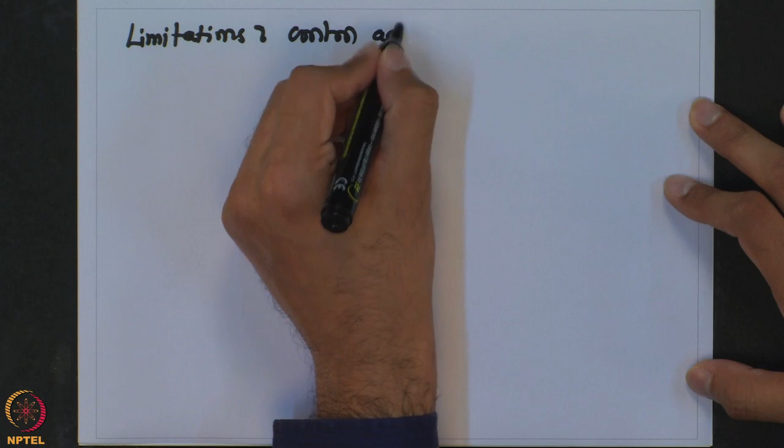When we talk about only the P control, the main limitation is that we do not get offset free response. So always the response will have some offset.

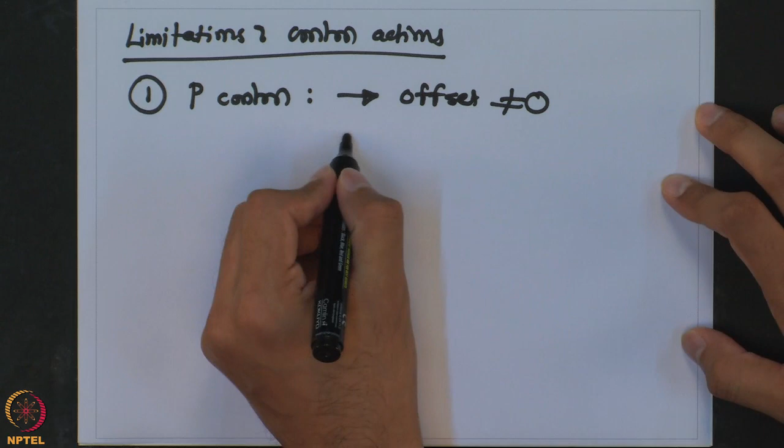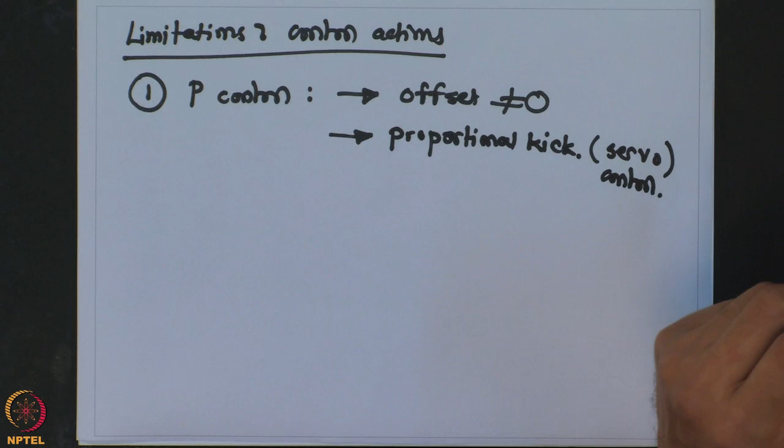And there is one more thing: whenever you have a proportional controller, it results in proportional kick. When we have a servo control, by proportional kick what I mean is whenever you request certain response...

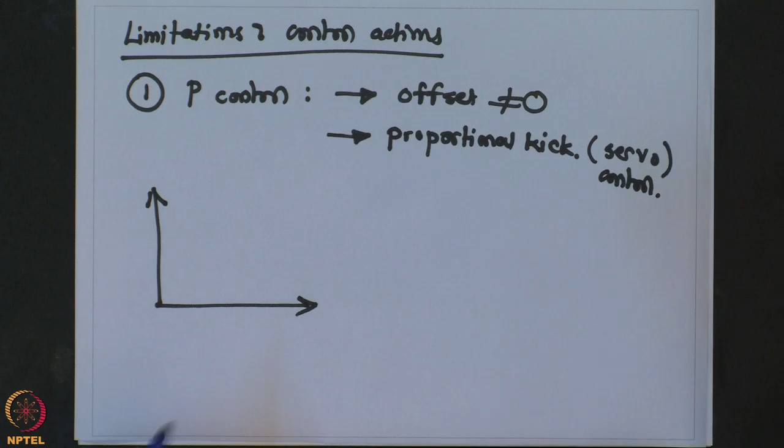Let us say at certain time I requested a set point change. If we try to plot the response of the manipulated variable or the controller output, what you will notice is that the moment this step is applied, the controller will ask a rapid change in the manipulated variable, and then alternate, eventually reaching whatever is the final value.

So this initial jump, the moment the set point change is requested, is known as proportional kick. That means it just kicks the response, it asks the manipulated variable to go to a new value almost instantaneously.

Again, practically this is not possible and it will cause a little delay in terms of reaching the final steady state, but the idea is that it causes this abrupt change in the manipulated variable.

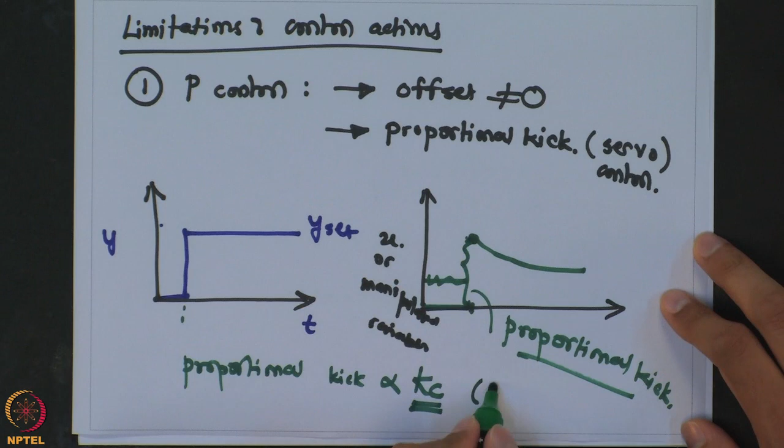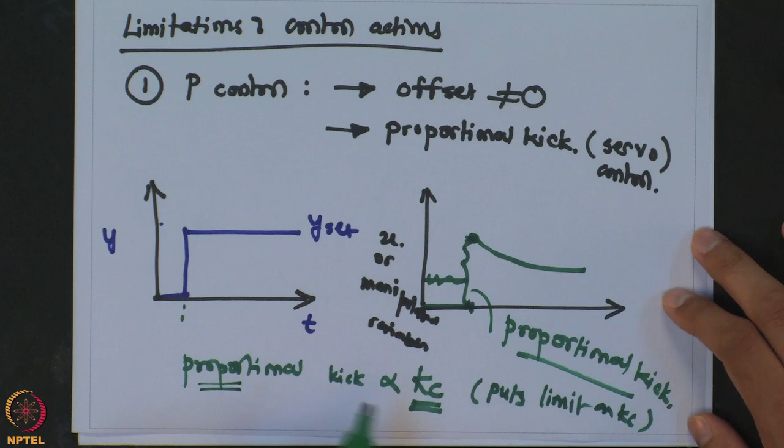So again that puts a limit on the value of Kc I can go with, because we had seen that for a P controller, higher the controller gain, smaller is the offset. So we typically want to go with higher controller gain, but at the same time this proportional kick also increases, which puts a limit on practicability of operation, and limits how much controller gain we can go with. This higher requested value may be more than the maximum value, and in that case it may not be physically realizable.

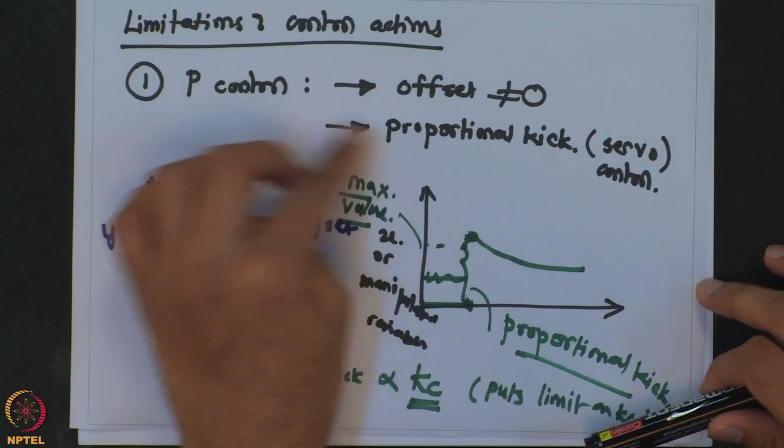So that is the disadvantage or limitation of P control: it will always result in proportional kick when we have a set point change. Now, as this is the limitation of the proportional action, this same kick will be present whenever you have proportional action, a PI controller, or a PID controller as well.

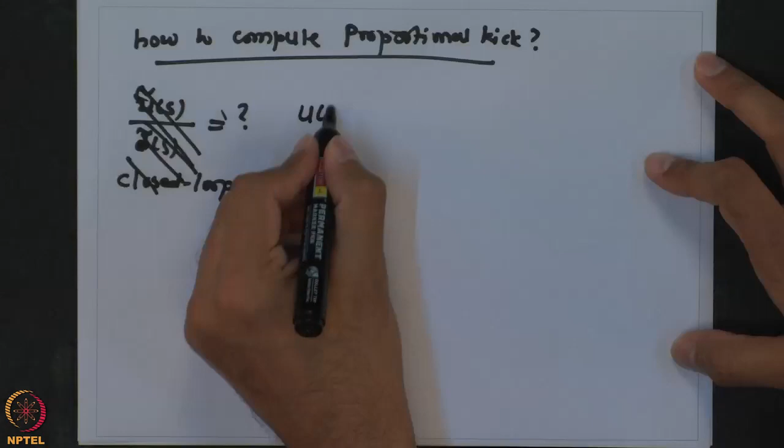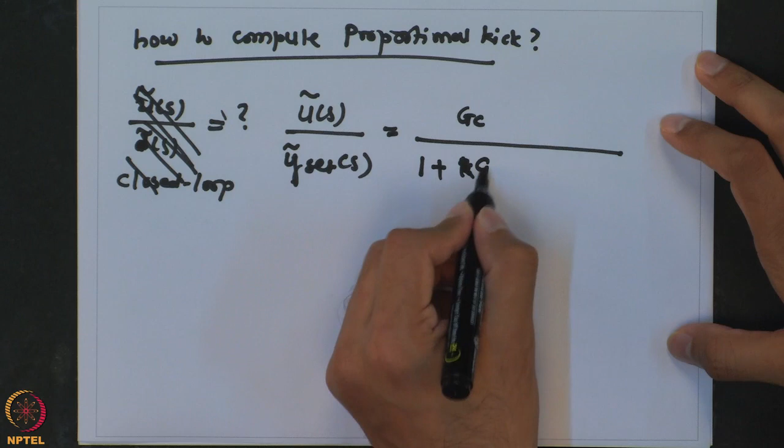Now let us quickly look at how to compute this proportional kick. For that, what we are interested in is finding out u over y set. So when we change the set point, how does the controller output change, and this can be derived as GC over 1 plus GP, GC, GV and GM.

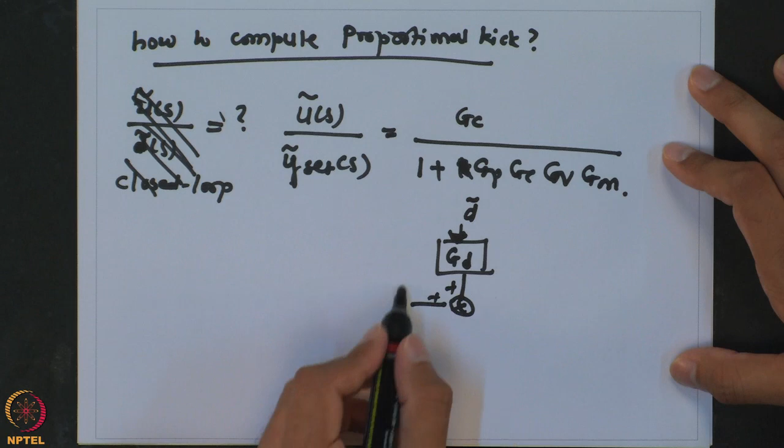So, the easy way to obtain these transfer functions is if we look at the closed loop transfer function block diagram. We may be interested in the transfer function between u and y set, u and d, or how the manipulated variable behaves when we have a set point change or the disturbance occurs.

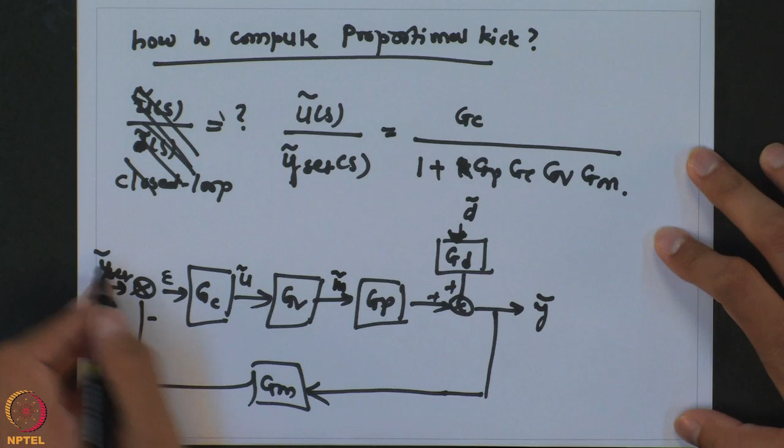So in all these cases you do not need to go through the entire derivation every time. The easiest way to find out these transfer functions is to trace the path from the input to the output. So if we are interested in finding this particular transfer function between y set and u, you just find out what is the direct path between y set and u.

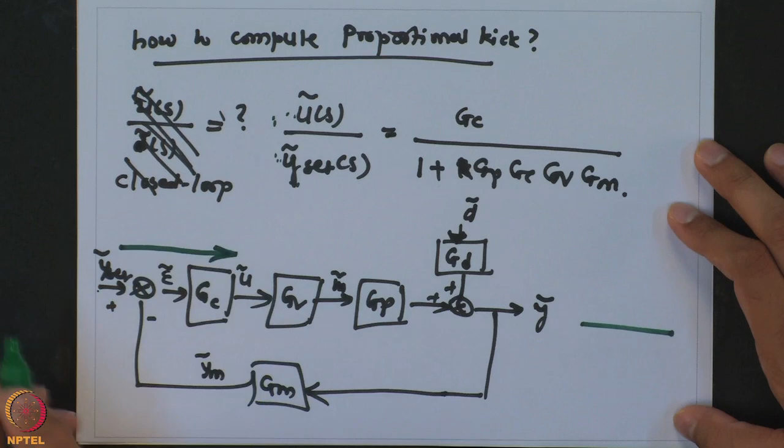So when we are going from y set to u, what we are seeing is there is only one transfer function in between. So we put that here, and then the denominator depends on the denominator, which is always 1 plus all the transfer functions in the closed loop. So the transfer functions in the closed loop are GP, GC, GV and GM. So it will be GP, GC, GV and GM.

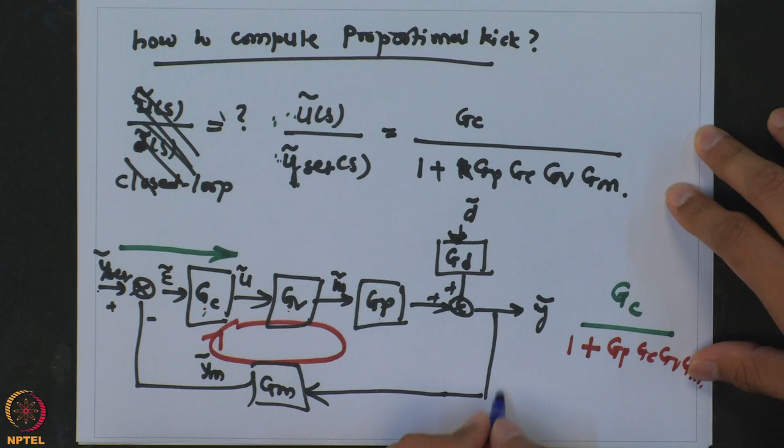Using the same logic, if we were interested in finding the transfer function between, let us say, US over DS, then the denominator remains the same because the closed loop is not changing.

But for the numerator, now we have to go from D to U. So the path it is going to take is this. Let us go through all the transfer functions. So you have GD, then GM, and then we have a negative sign because the effect gets inverted. So you also have to carry that negative sign here, and then GC. That way you can always find the transfer function between any two variables within this closed loop system.

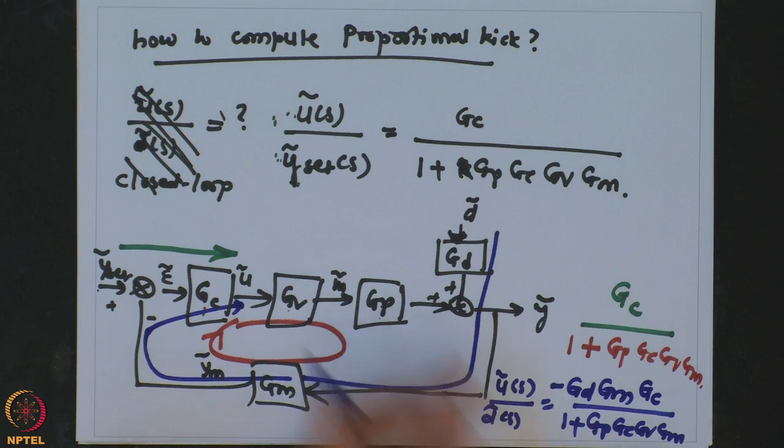Then when you try to find out whenever there is a step change in terms of y set, you will see that the response between u and y set is a first order lead-lag type of system, and that is what causes the initial value to abruptly change to a new value, and that difference gives you the proportional kick.

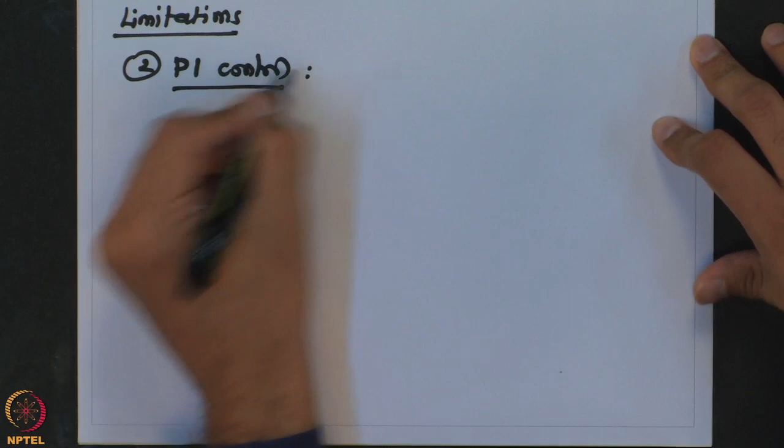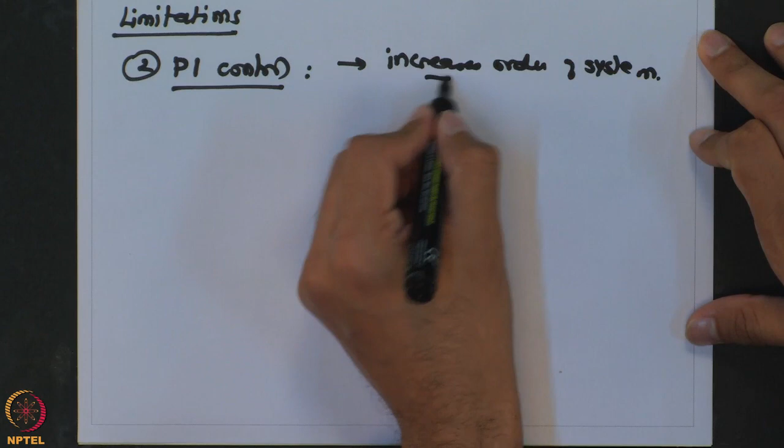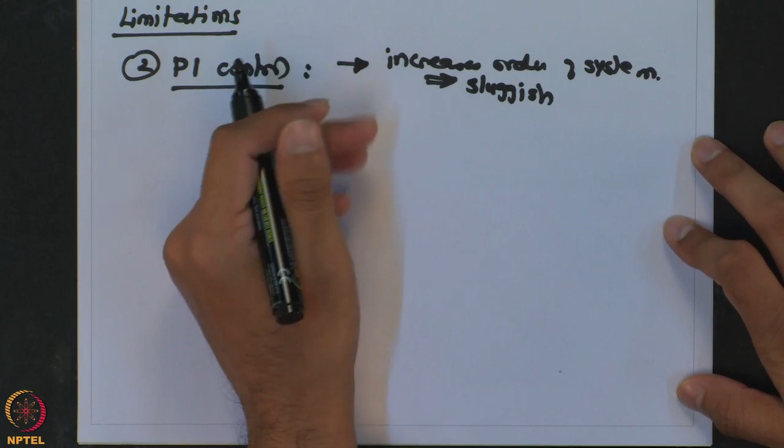Let us now look at the limitations of PI control. One limitation is that it increases the order of the system, so it makes the system sluggish. Though this is not a very big disadvantage, it is partly covered because we have also added some numerator dynamics, so effectively the system response can still be sped up.

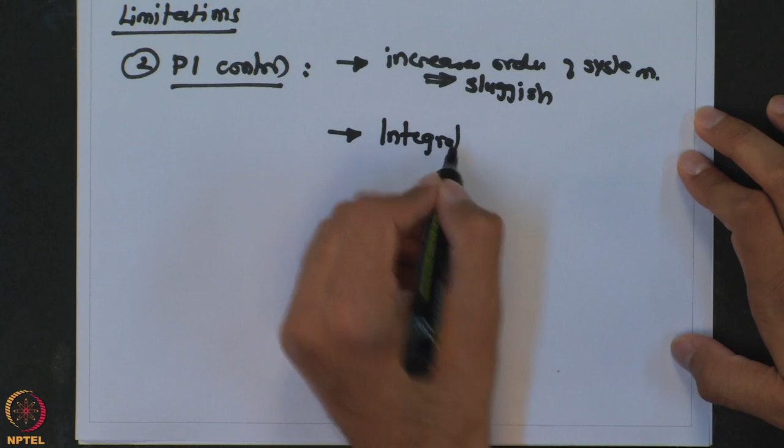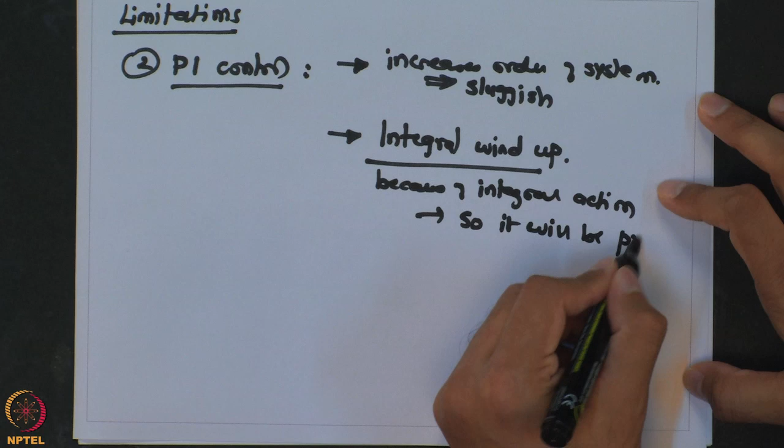The major limitation of PI control is what is known as integral wind up, and this is present because of the integral action. So it will be present in PID also, because it is the product of having an integral action into the system. As integral action is present in PID control as well, this integral wind up may also occur during PID control. Let us look at what integral wind up is.

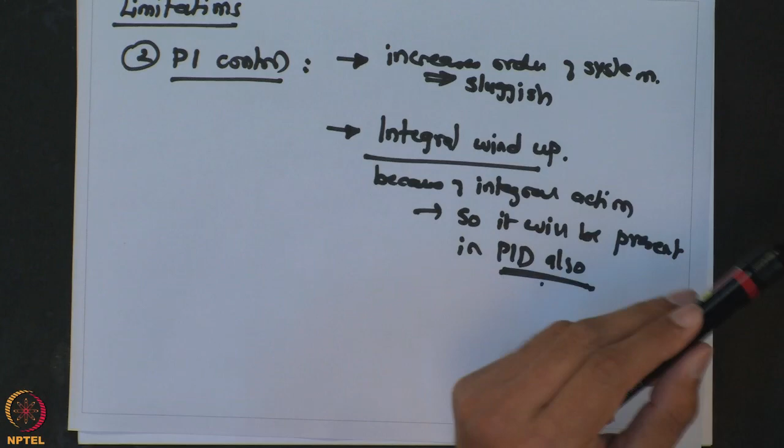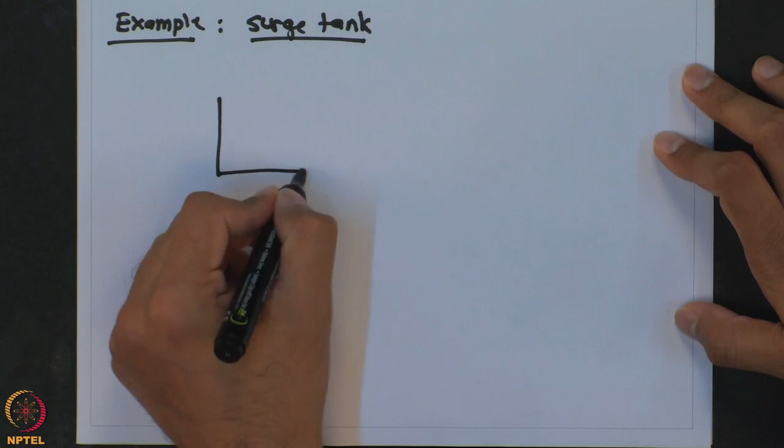For that, let me consider a simple example of a surge tank. Let us consider a surge tank where the inlet is coming at a flow rate of 0.1 meter cube per second, for example. The area is 1 meter square and the level is currently 0.5 meter.

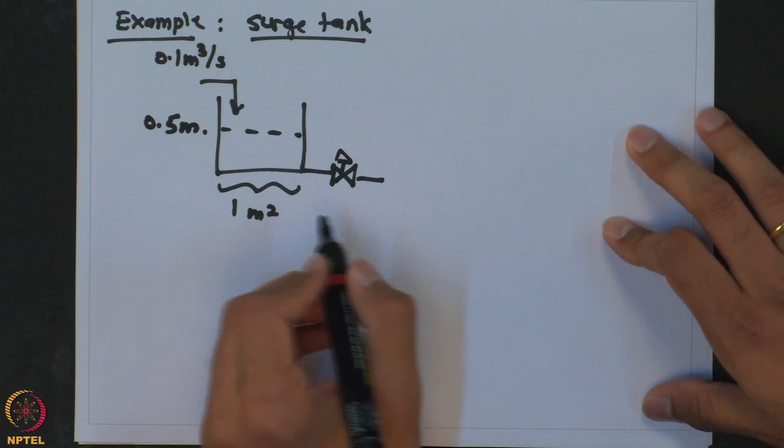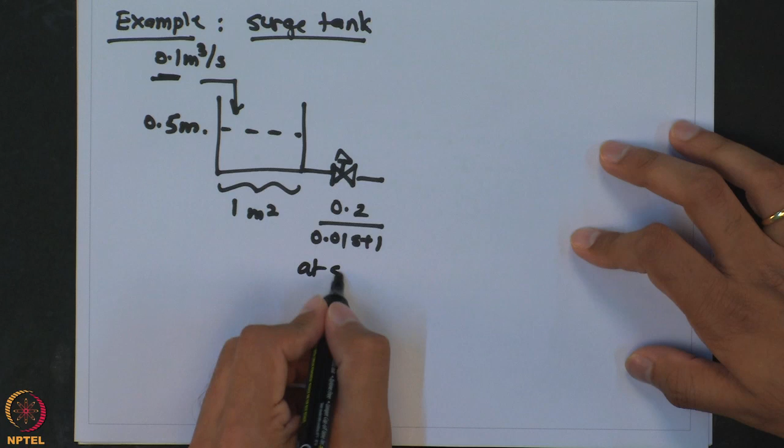At the outlet there is a valve whose transfer function is, let us say, given by this. The maximum flow this particular control valve can take is 0.2 meter cube per second, so at any time it can take almost twice the inlet amount of flow. By that, at steady state when inlet equals outlet, the flow rate will be 0.1, so the valve will be 50% open.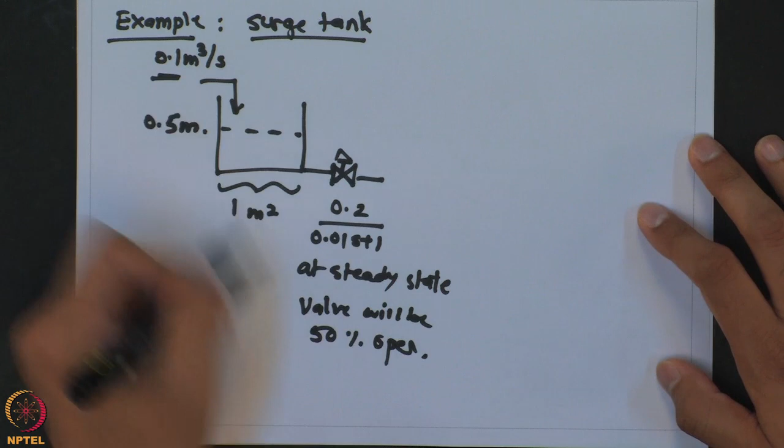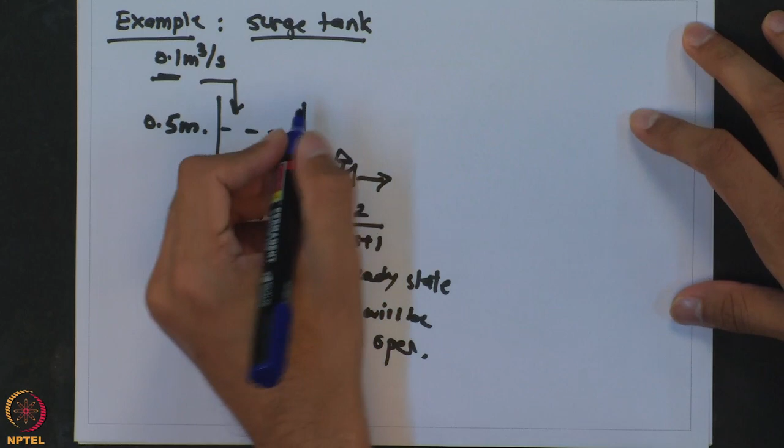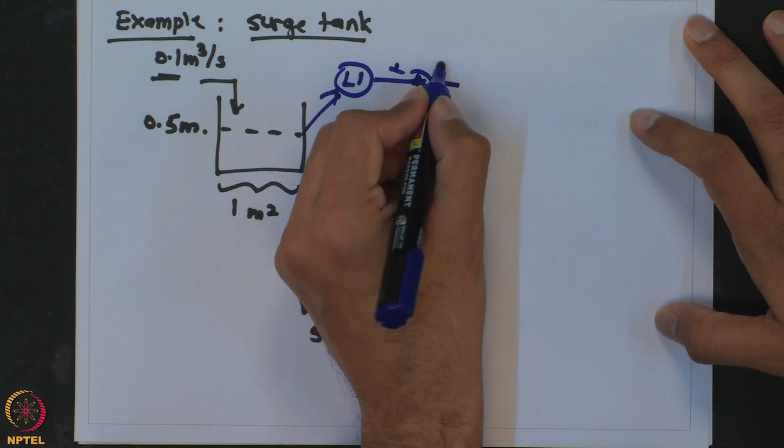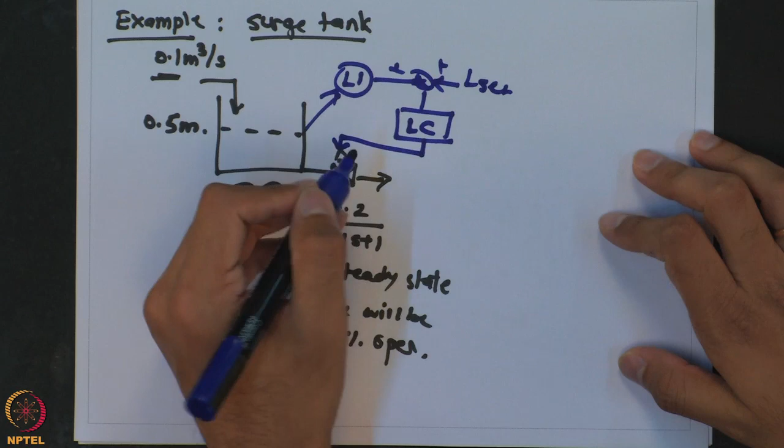We are considering a linear valve, so the flow goes from 0 to 0.2, and at 0.1 it will be around 50% open. We have installed the PI control on this. We measure the level, so level indication, and then it goes to the comparator, and from that comparator it goes to the level controller, and the level controller will give a signal to the valve opening, and accordingly the valve will open or close depending on whether the height is at steady state or not.

We are interested in moving the level from 0.5 meters to 0.75 meters, so that is our objective. It is a servo problem, and the values of controller parameters we are going to use are Kc equal to 5, and we will use an integral time constant of 1. Let us see what happens.

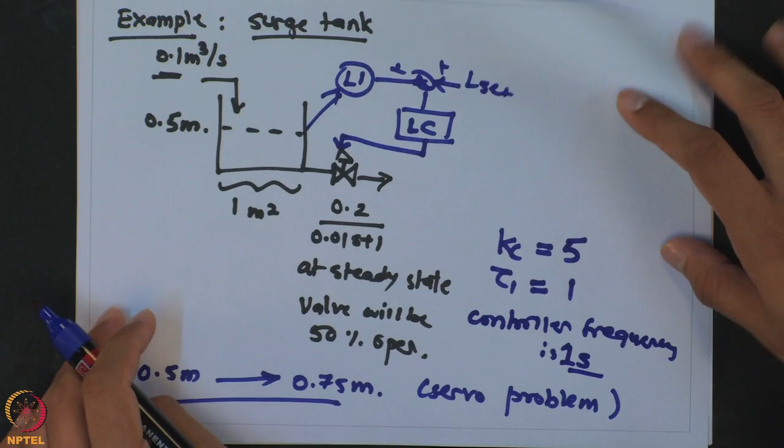Let us try to calculate manually how this particular control system is going to operate. We will also assume that the controller frequency is 1 second, so whenever the controller takes any action, that action will remain there for 1 second, and after every second the controller will take an action depending on the feedback interaction with the system. For this particular system, let us tabulate how the system will respond.

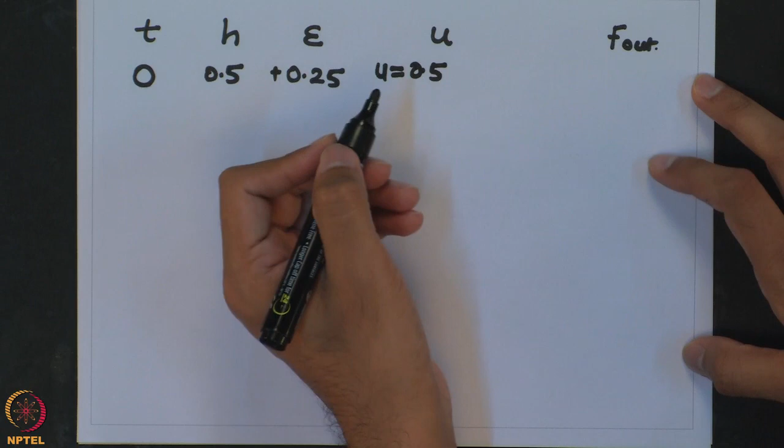So we have time, we will monitor how the height is going to change, correspondingly what is the error, what is the value of controller output we are going to get, and accordingly what will be the outlet flow rate. Let us start with time t equal to 0, the height is 0.5, and as we have requested the set point to be changed to 0.75, it causes the error to be positive 0.25, and accordingly the controller will take action. The initial value is 0.5, it is going to be a direct acting controller, so the controller gain has to be negative.

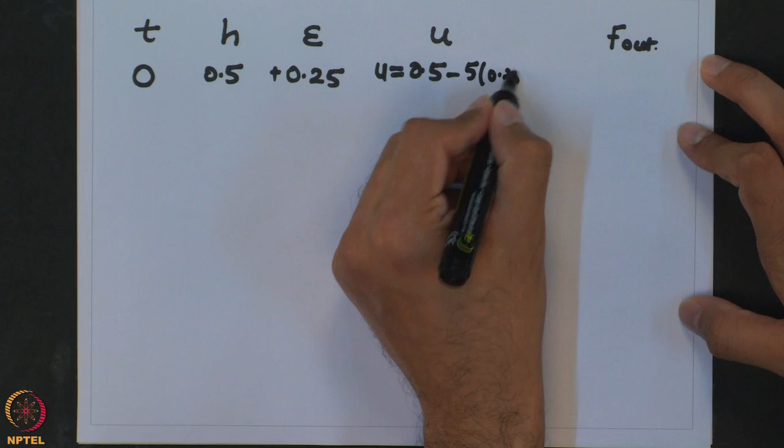So it will be minus 5 times error, which is 0.25, which comes out to be minus 0.75. So the controller output has to be minus 0.75, but the valve can only have an opening between 0 and 1. So practically it is equal to 0.

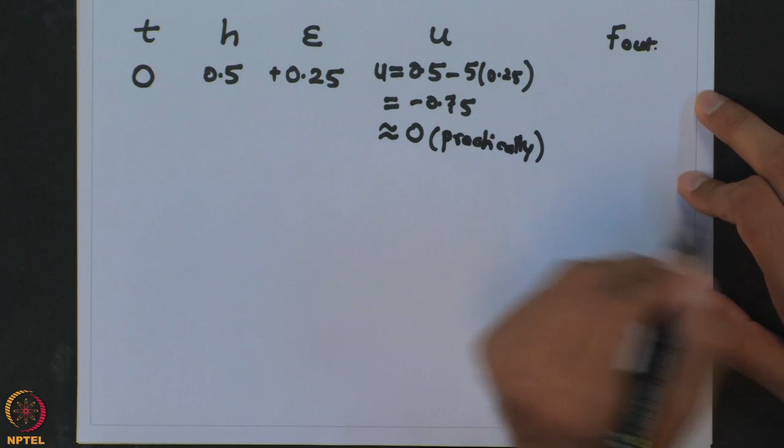That means the valve completely gets closed and the outlet flow rate becomes 0. So suddenly from 0.1 meter cube per second, the outlet flow rate has dropped to 0.

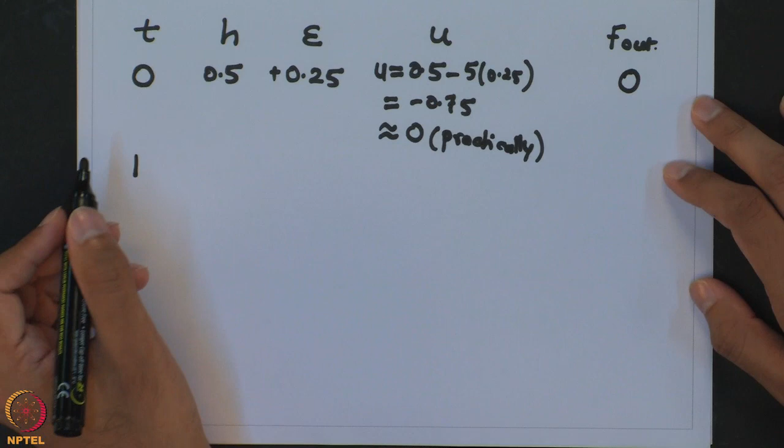As the outlet is 0 and the inlet is 0.1 meter cube per second, the net influx of material into this tank is going to be 0.1 meter cube every second, area is 1 meter square. So the height is going to change at the rate of 0.1 meter per second. So in 1 second the height will increase by 0.1. So at the end of time 1, the height would have reached a value of 0.6.

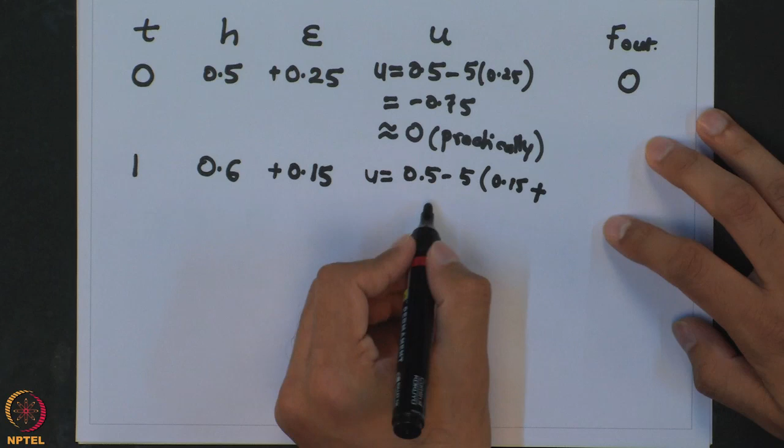The error is now better, the error has become 0.15, and the output will now be 0.5 minus 5 times 0.15 plus integral of error. So the integral of these two errors will have 0.25 plus 0.15 over 2, which comes out to minus 1.25. So again this is less than 0.

So practically the valve is still closed, so outlet is still 0. We reach time 2, the level by then would have reached 0.7, the error becomes 0.05.

When you calculate the output for this, it comes out to minus 1.25 again. So again the valve remains closed, and then at the next time instant, the level is going to cross the set point. So our set point was here, so we have already crossed the set point.

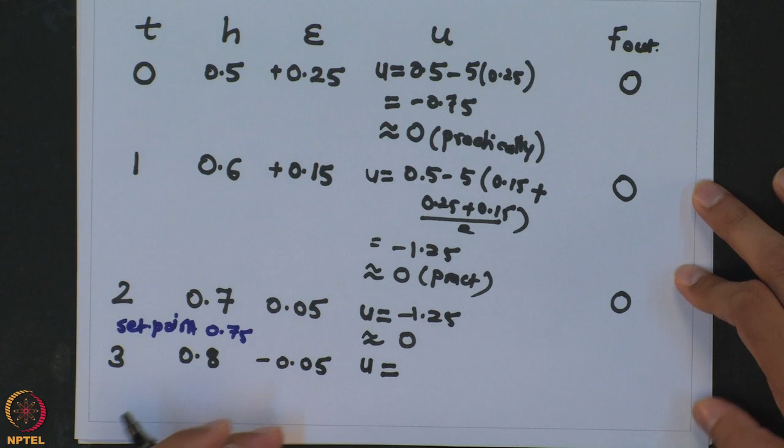The error will now become minus 0.05, and at that moment, if you were the person controlling this process, ideally you would have wanted the outlet flow to be greater than the inlet flow, so that the level will eventually try to come down from this point. However, what you will see is that the controller output in this case is again minus 0.75. So the valve still remains closed.

So now you should be able to see the problem. The set point has been crossed, the value of the controller output has gone beyond the set point, but still the control valve is closed. That is the problem, because we are spending too much effort on the integral action. All this is happening because of the integral action. The proportional action has already told you that the controller output has to increase, but the integral action is dominating the proportional action, and the valve still remains closed.

If you continue with these calculations, you would see that the level at the end of 5 seconds would reach 0.95, and then will be the time when the outlet flow rate would eventually be 0.2 and the level would start to drop. So the level will reach a value of 95%, so the tank will be almost close to full level, even though the set point was 75. So the overshoot was almost 0.2, and this whole thing is happening because you are penalizing the controller.

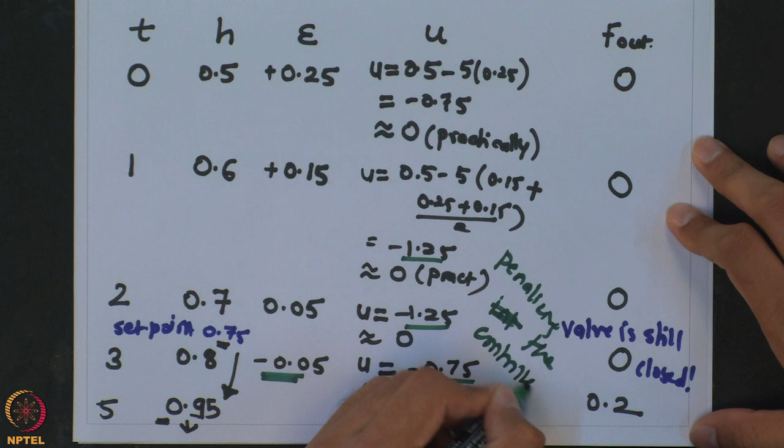So all these high negative numbers we are getting, even for the error which is positive, which is correct, and negative error is penalizing the controller, even though it is doing the maximum it can. So even though you are asking it to become highly negative, or asking the outlet flow rate to go down, it has already gone down to the minimum value. It can no longer go further down, but still you are penalizing it for that poor performance. That is not correct. That is the reason why you get such a high offset from the current value, and this particular thing is happening because the control valve is saturated.

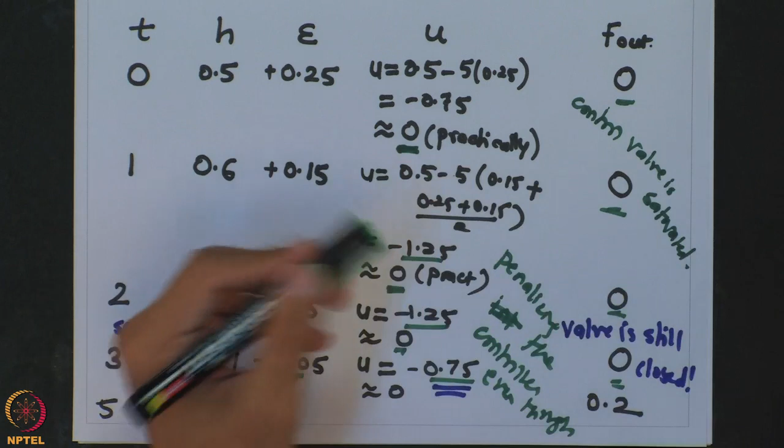So, in that case there is no point in accumulating the error, and this is the thing which is causing this high overshoot. This particular phenomena is known as integral wind up.

It will be present whether you have a PI controller or a PID controller. Whenever the control valve gets saturated, there is no point in keep on adding or having the integral action, because it is unnecessarily going to accumulate all these errors as a history, and then whenever the response or the valve becomes in order for the valve to become in control, a lot of undoing has to be done for all these accumulated errors. So, this is known as the integral has wound up. So, now it has to unwind before it starts moving in the correct direction. So, that is the limitation of integral controller, that it can cause this kind of integral wind up, which results in very high overshoot values.

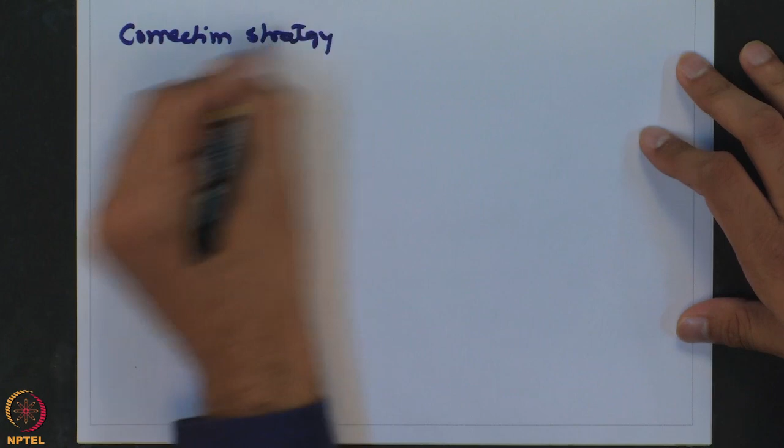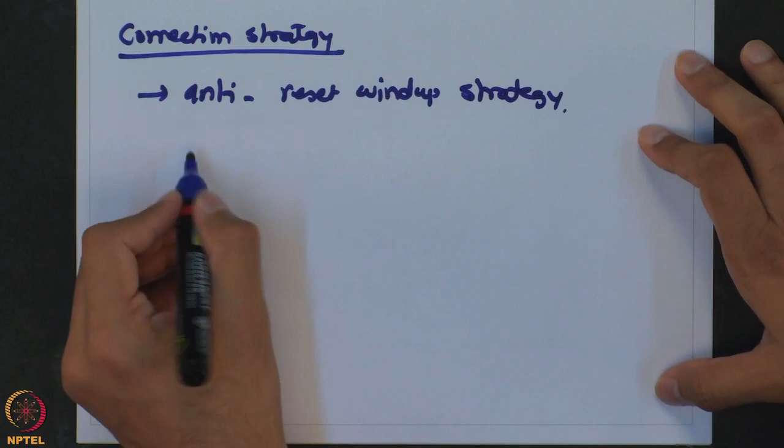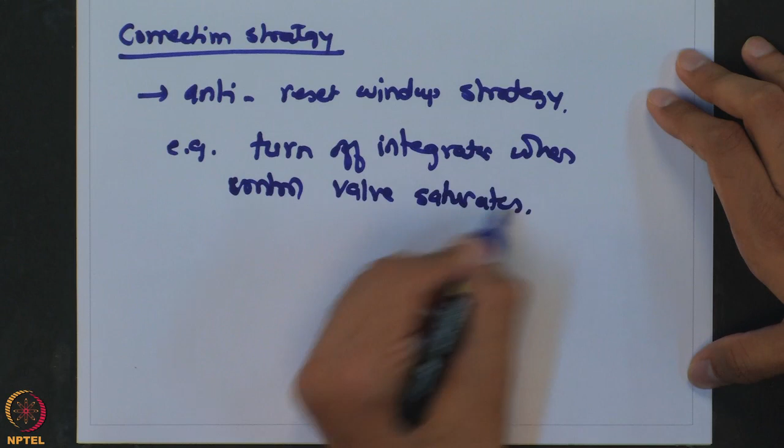The way it can be corrected is by having anti-reset type of action. That is known as anti-reset wind up strategy. So, one of the strategies can be to turn off integrator when control valve saturates. It makes sense that as the control valve has already saturated, as the control valve is saturated, it can no longer move the system, it cannot do anything better than that. So, there is no point in keep on penalizing for the history or the bad performance during that phase.

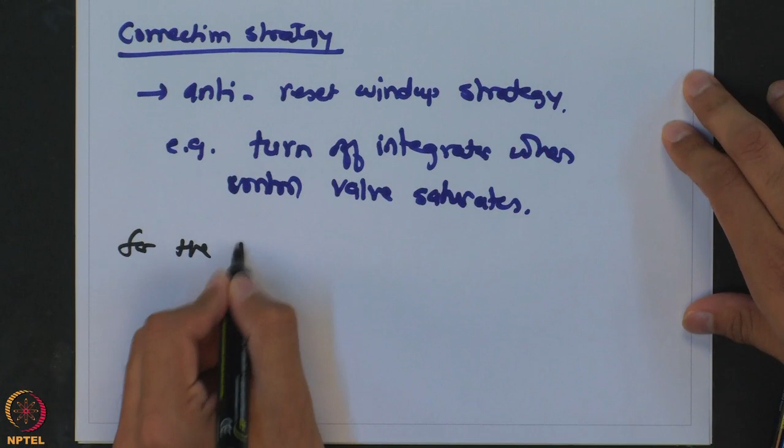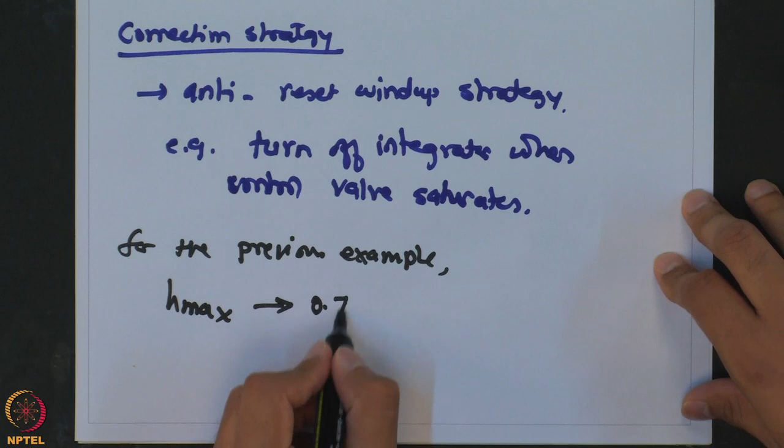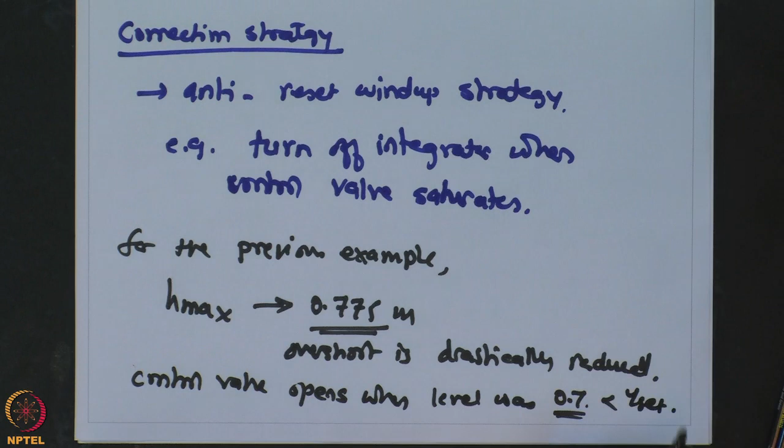So, if you do that for the same example, the maximum level to which it goes suddenly reduces to 0.775. So, overshoot is drastically reduced, and the control valve also opens when level was 0.7, before the set point, so that it starts taking the corrective action and the level does not go too far beyond the set point.

So, that is the limitation of integral action, that in certain cases it may result in integral wind up, and whenever you have integral action as a part of PI controller or PID control, you have to have some sort of anti-reset wind up strategy. One of those strategies is just to turn off the integrator whenever the controller saturates.

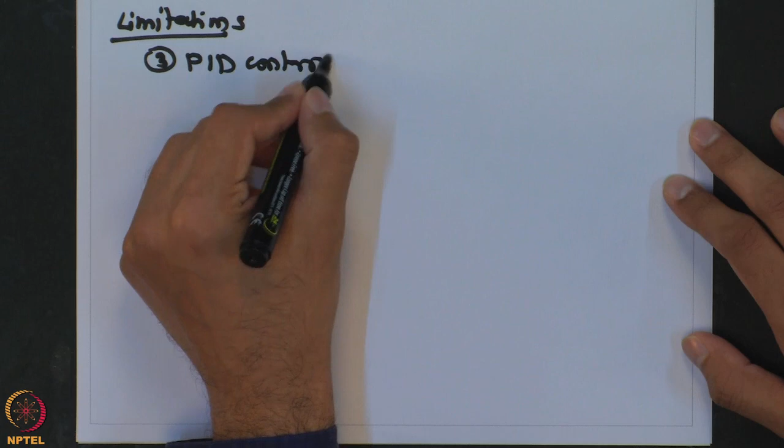So, let us now complete this analysis with the limitation of PID controller. Here we will exclusively look at the limitations coming because of the derivative action. As we are using PID controller, it is anyways going to have the limitation of P controller, which was the proportional kick, and the limitation of integral action, which causes reset wind up, integral wind up. So, both these things are already present when you have a PID controller.

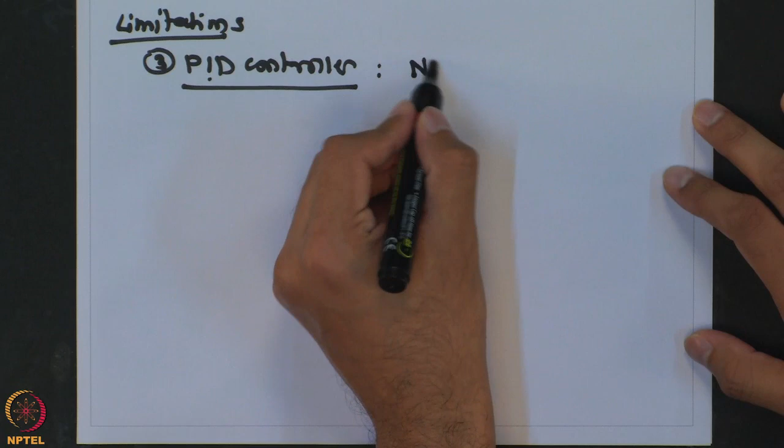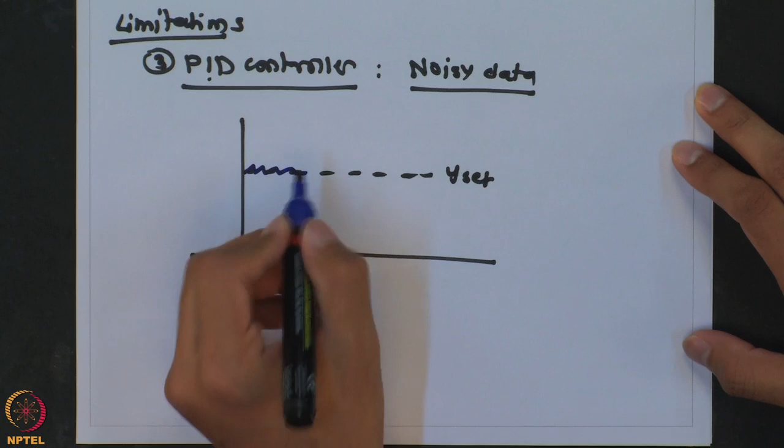In addition to that, a PID controller has a limitation when you have noisy input or noisy data. So, let us look at an example: this is your set point, and the output response in a typical real life plant would be something like this. It will be moving around this set point. It will never be exactly equal to set point, or it will not exactly remain at the set point, because there are a lot of disturbances in terms of signal transmission, or also some small disturbances which are happening in the plant at a very high rate. So, the actual response may not exactly lie as a flat line, but it will keep on having certain vibrations or oscillations around this set point.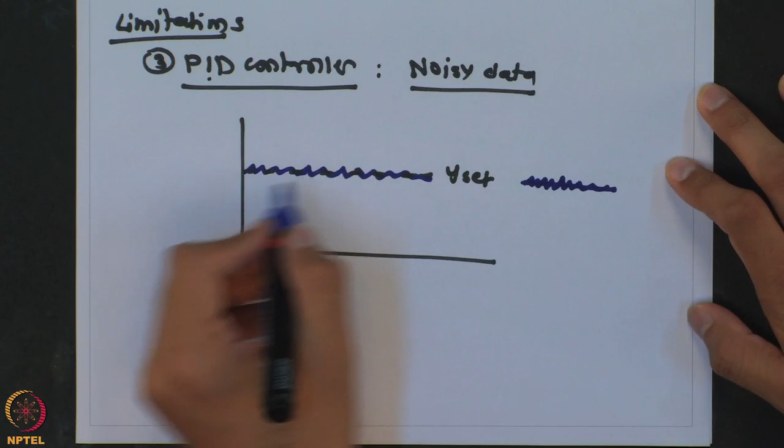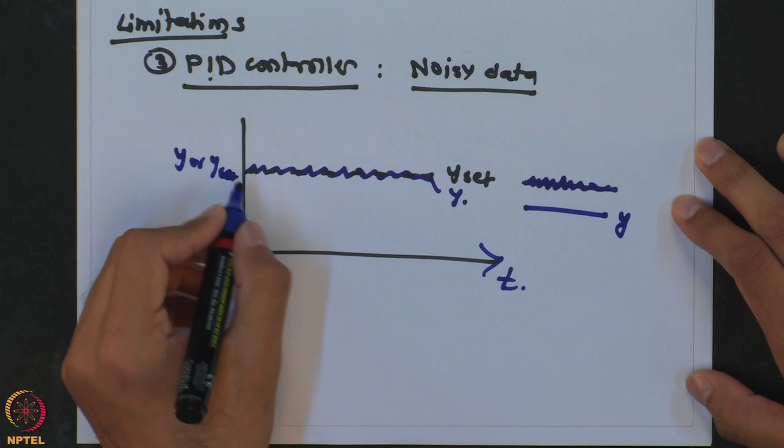So, Y is our output. If this is the plot which is given to you, would you take any action to remove these small wriggles and make Y equal to Y set? In reality you would not want your controller to take any action because of this. However, if you magnify this particular portion, what is happening is the system is continuously moving up and down from the set point. So, this is just a magnified view of this.

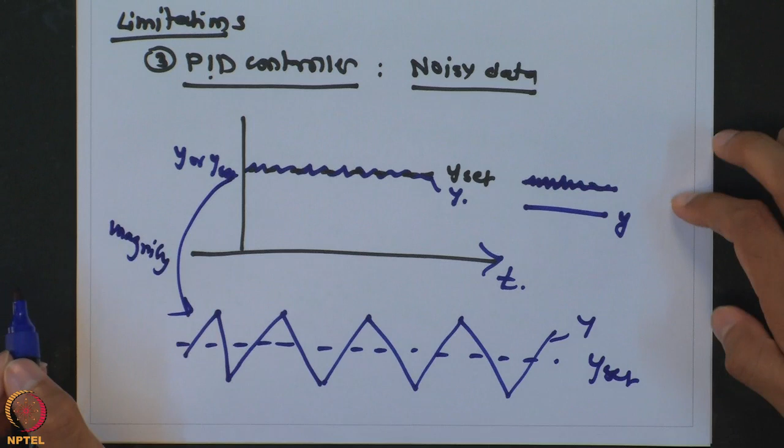So, what you are going to see is in general the proportional controller is not going to take any action here, because the magnitude of error is very small. So, error is always going to be between these values. So, the P controller will not take any action for that. If you look at the integral of the error, those are also very small. So, the I control, or let us say PI control, the integral action again will not take any action. But if you look at the derivative action, you will see that here the derivative is positive, suddenly the derivative is negative.

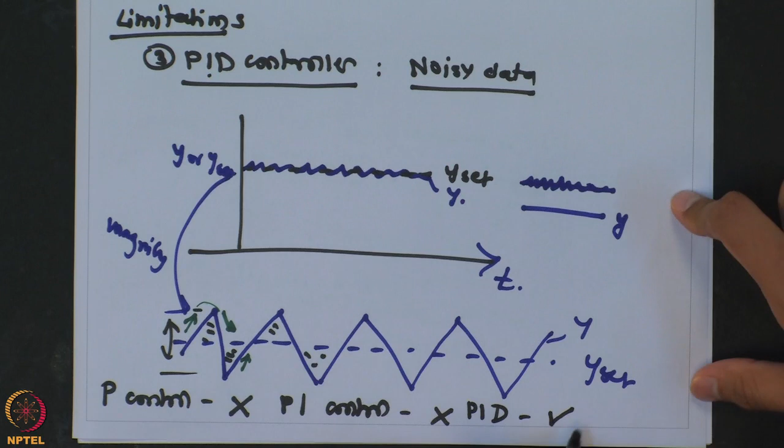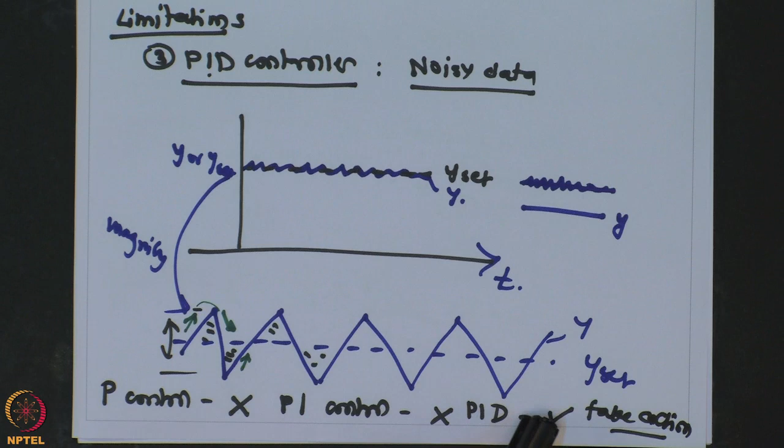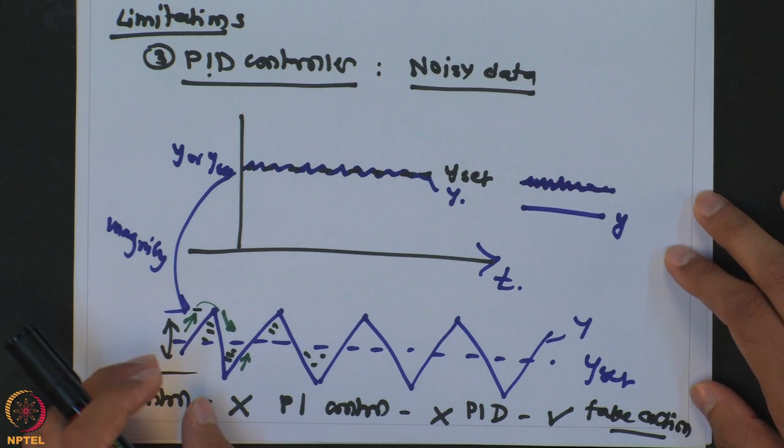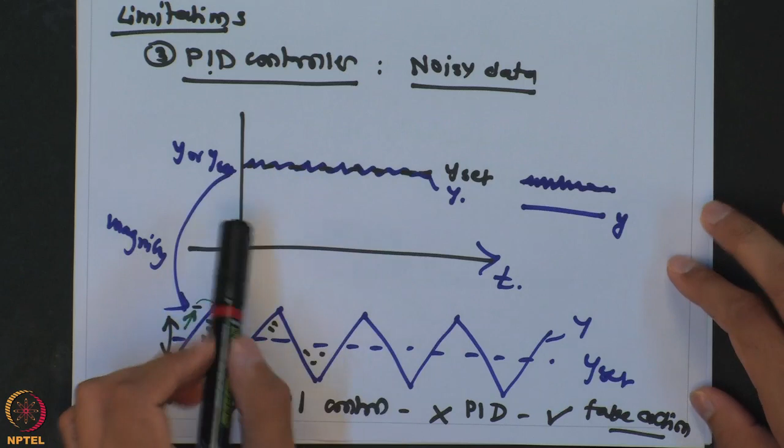The derivative value can be much larger than the actual value of the error, and in that case the derivative action will try to react, or try to take action to eliminate small fluctuations in the output, which are actually not required. Because this error is changing direction, the derivative action will have a very significant contribution, and if tau d is not selected properly, or has a significant value, the controller will try to get rid of these fluctuations. Since these are natural fluctuations where nothing can be done, the manipulated input or controller output is very close to the desired value, but because the derivative action is trying to react to these fluctuations, it is going to change.

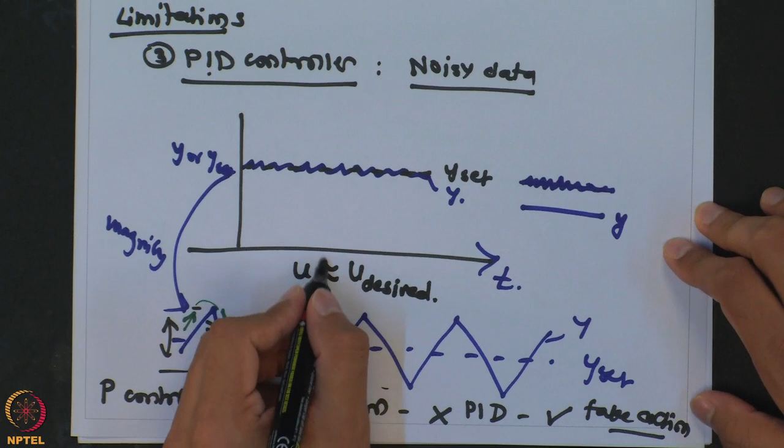So the PID controller will cause you to move away from this desired value, and because of that the closed loop response may become unstable, or start oscillating at a much higher amplitude. That is a very common problem in real plants: whenever the derivative action is significant, it reacts to noisy measurements, noisy data, and because of that it causes bigger oscillations into the process rather than not having any derivative action.

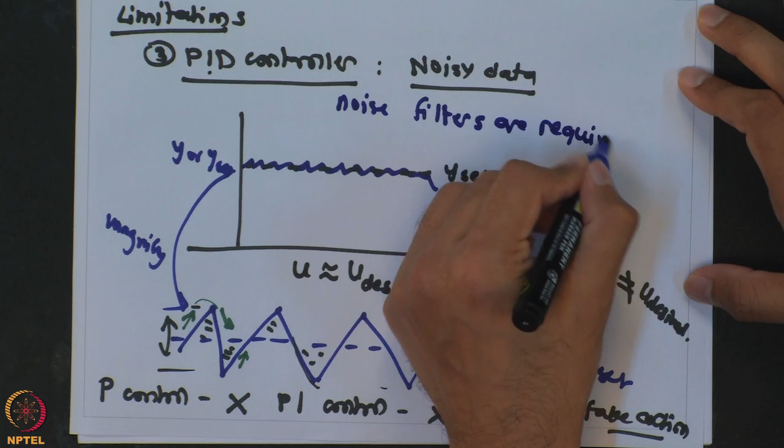So the derivative action will always try to react to this noisy data, and to eliminate that you typically need filters. Noise filters are required, but still the data can never be perfectly smooth in a real plant, and the PID controller will still try to react to it if the derivative action is not correct. So that is a very major limitation of derivative action, which significantly limits the implementation of a PID controller. Unless required, derivative action is typically never used in a real plant.

That sums up the limitations of these three types of controllers. Let me show you some sample responses for a simple liquid surge tank, and how PI and PID controller responses look like, for a regulatory problem. In this case we will have the same set point, look at the effect of an input disturbance, and also see the effect of controller parameters.

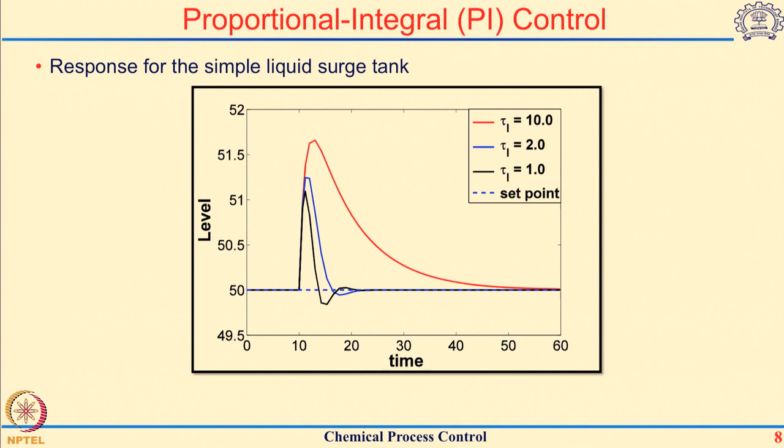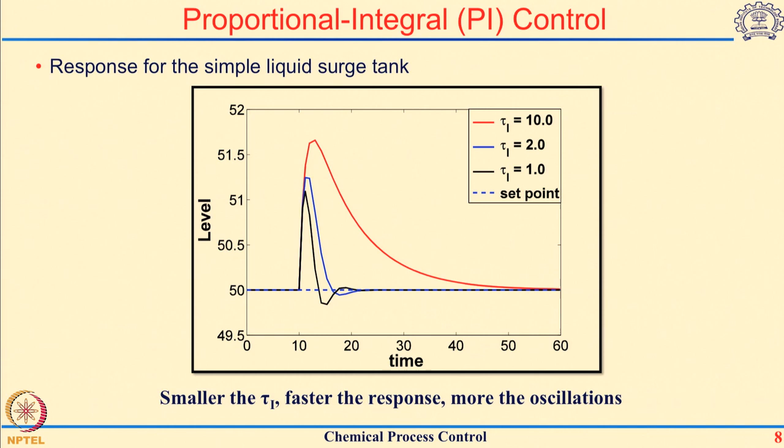As you keep increasing the contribution of integral action by reducing tau I, the response becomes faster and faster. But in all cases, you see an offset-free response—all the responses go to the set point value. Smaller the value of tau I, faster the response, but it comes with a disadvantage: the response becomes oscillatory.

Then we look at the addition of a derivative action. This derivative action is going to bring down that peak value—it reduces the overshoot by having an increased value of derivative action. We are going to get smaller overshoots.

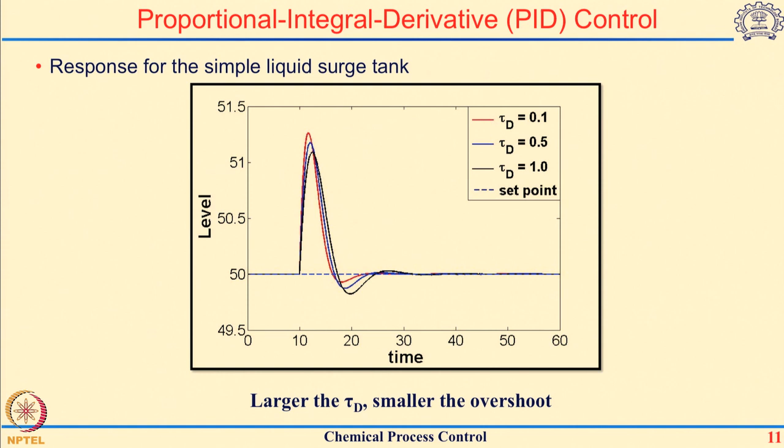So in summary, if you look at the comparison of all these three actions, the proportional controller gives you a fast, non-oscillatory response, but the offset is not equal to zero. When you add integral action, the response becomes oscillatory and the offset becomes zero, but there is also some overshoot. When you add a sufficient amount of derivative action, even that overshoot can be reduced.

So in summary, the P controller is the simplest controller to implement. It is very fast in terms of taking action, but the disadvantage is that it cannot guarantee an offset free response. In order to get rid of that offset, you add integral action, so it gives offset free response, but then it increases the order of the system, slowing down the system response. It also introduces oscillations into the process.

The addition of derivative action gives an overall PID controller that provides offset free response as well as a relatively faster response and smaller overshoot, but one disadvantage is that it will react to noisy data. Another thing is that now you have to coordinate three actions.

So when you have a PID controller, you have to look at the contribution of proportional action, the contribution of integral action, and the contribution of derivative action. All three have to be properly weighted in order for that controller to give you these desired outputs. If one of those overweighs the other two, then these advantages would not be realized in practice.

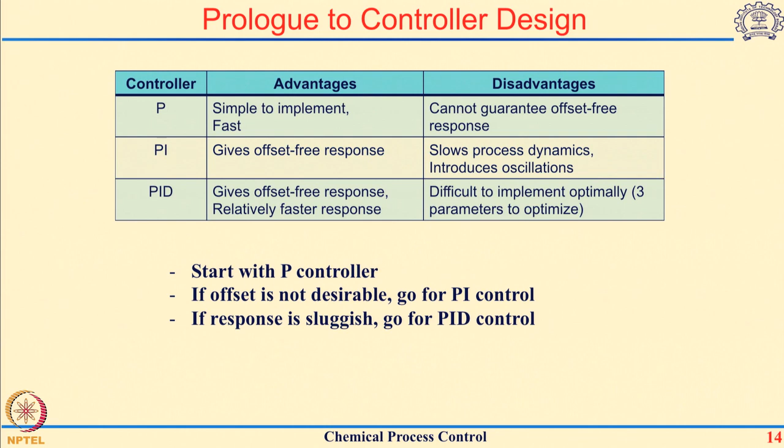If the addition of integral action is going to slow down the response, then you will also add a little bit of derivative action and go with a PID controller. In general, if you visit any chemical industry, you will see that most controllers, wherever offset is undesired, use a PI controller rather than a PID.

The reason being, the derivative action reacts to noisy data which is part and parcel of real plant data, and also properly tuning the weightage of these three actions is really a tricky job. So that is why most of the time we stop at a PI control, and unless the system demands a derivative action, you will not go with a PID controller.

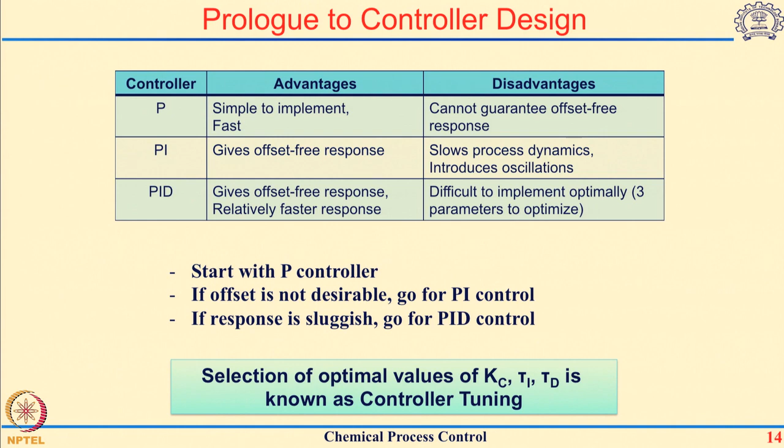Lastly, what is the best value of these controller parameters like Kc, tau I and tau d? That problem is known as the controller tuning problem. As said earlier, we will discuss how these values of Kc, tau I and tau d would be selected, so that you get these advantages in place while limiting the drawbacks of these control actions.

So we will stop here at this point, and in the next week we will look at one of the products of having a controller on the system, known as stability analysis. We'll see what is meant by a stable or unstable system, and look at the implication of having a controller on top of a system.